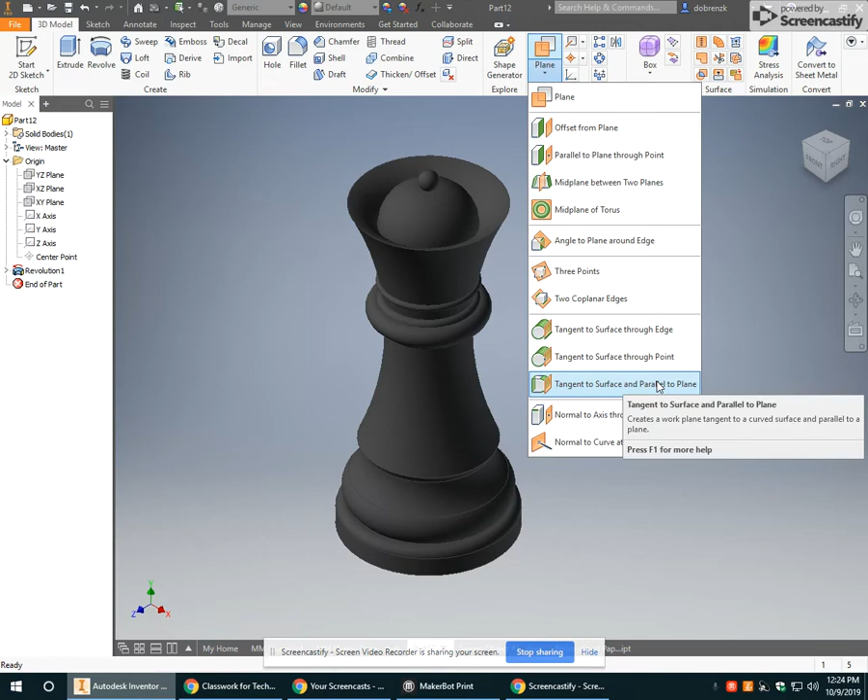Now, there's a lot of ways I can do that. I have lots of different ways to create planes. What I'm going to choose to do, personal preference, I would say, is to use a tangent surface parallel to plane. I generally like that parallel to plane aspect because I can choose an existing plane and just put it in a different location. So if I open up my origin folder here on the browser and I roll over the existing planes, the origin planes, what I like to do is pick the one that I want to make parallel just in a different location.

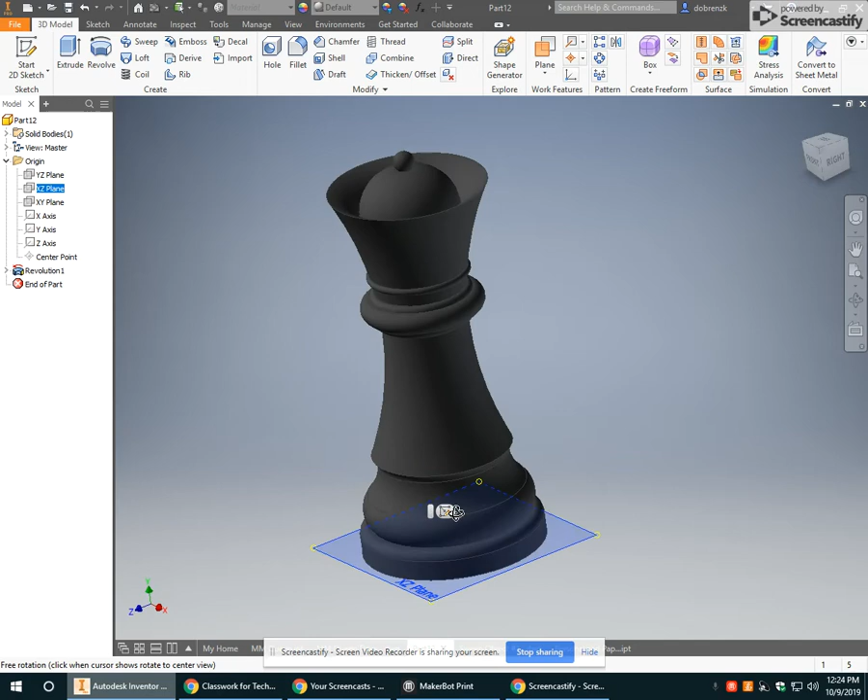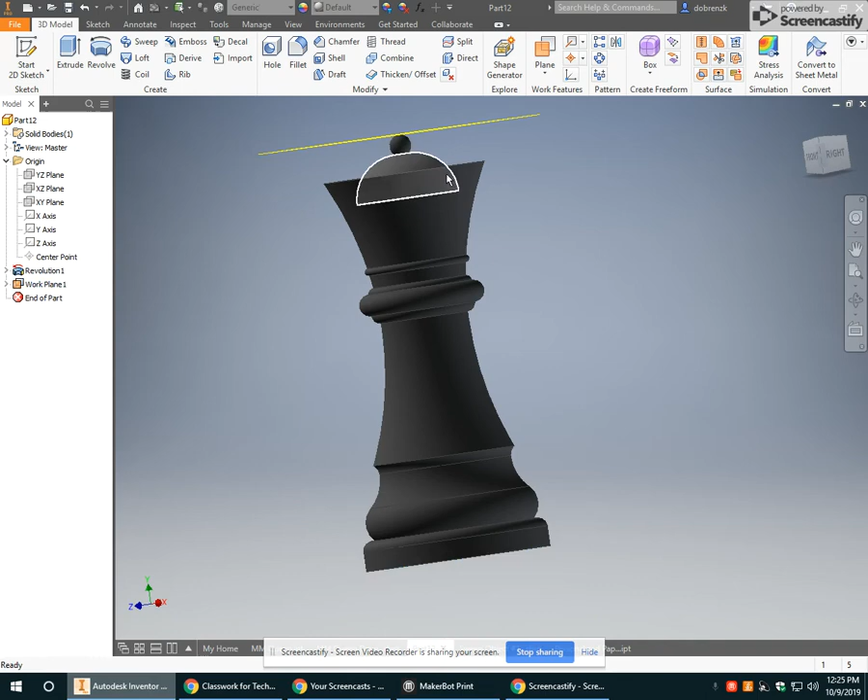And the XZ plane is the one I want to replicate because it is essentially flat on the bottom and I want one flat on the top, so parallel to that, just in a different spot. So I can highlight this and then click the button, or I can click this button and then go highlight it. Really doesn't matter. And once I have this selected, it's going to give me possible locations to put my plane. You can see how it previews it here. And I'm going to go to the very top. I just feel a little more comfortable that way. So no matter what happens, I'm only cutting in one direction.

So now I have this work plane on the top, and on this work plane, I can easily start a new sketch and start doing my scallops, which I can see in my drawing here. This top view shows me exactly what I'm looking for. Now, I don't have too many dimensions here, and honestly, depending on if there was a little variance in any of your measurements, these won't work if your crown was any different than what I have here.

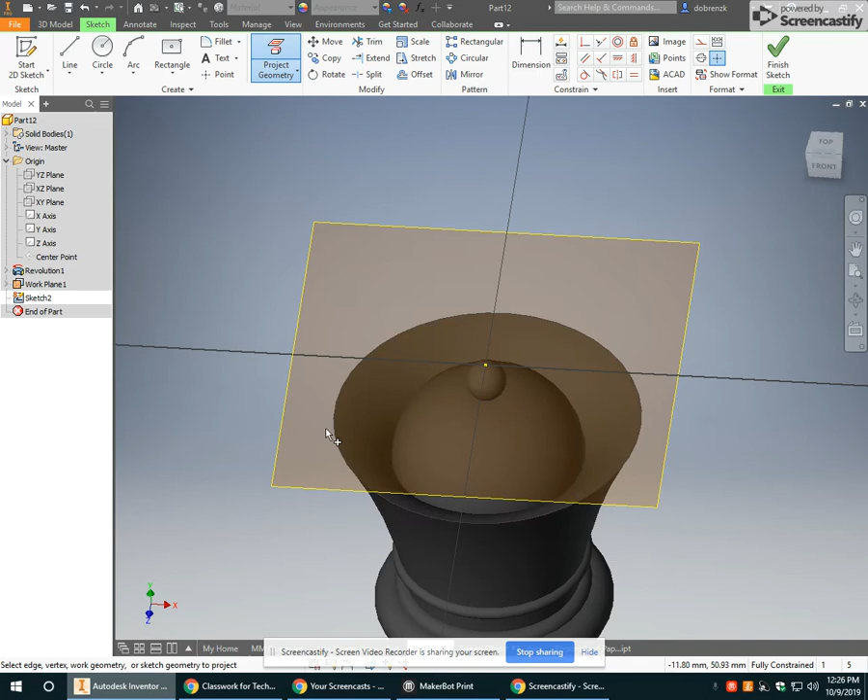So what's more important to do is use the existing features, the existing crown, and we can do that by using our project geometry tool, which essentially allows us to import lines that already exist or circles that already exist. Now I have a lot of different circles that pop up, so what I want to do is tilt it to the side so I can make sure I'm getting the top edge of that crown, because that's the one I want. And as you can see, once I click it, it imports it into my sketch. And now that's the sketch that I'm going to use as a guide.

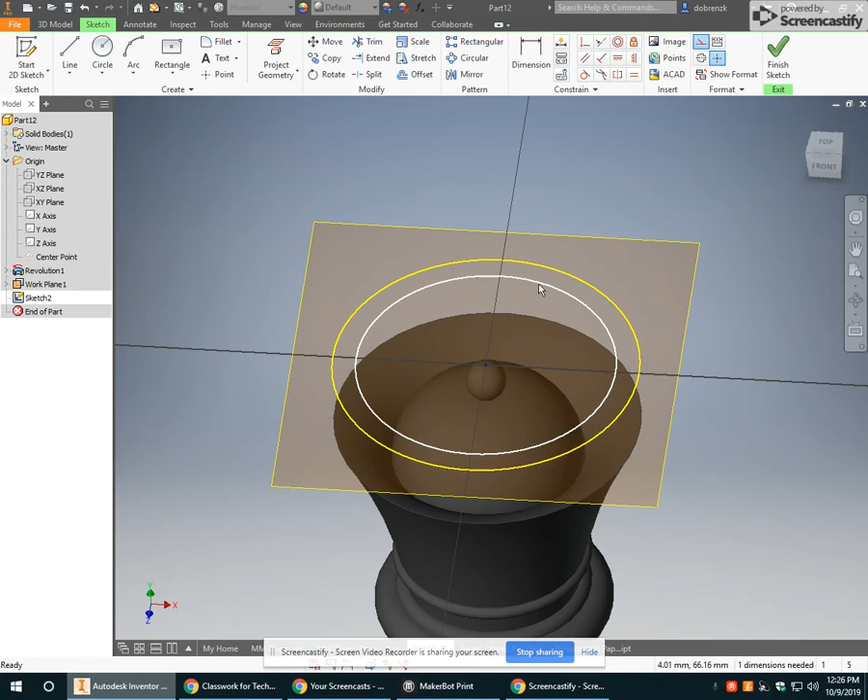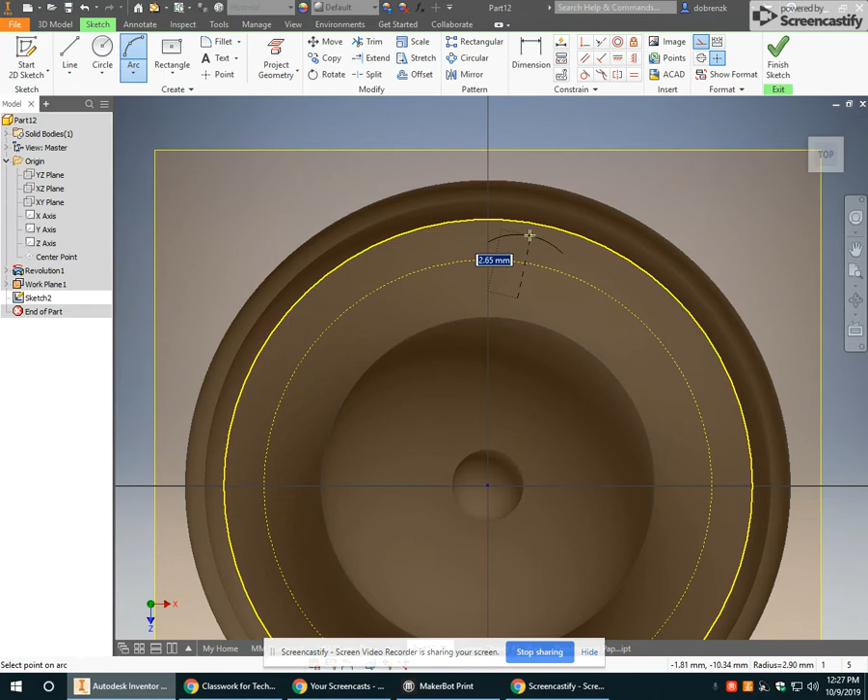I'm going to put one more circle on the top, and that's going to be a construction circle. And this is going to help me guide all my center points, so I can have all my center points on the same side. I'm going to get back to my top view, and I'm just going to use the arc tool, and I'm going to start making these arcs. Now what's really important is that your arc needs to be tangent to that yellow line you just made. Tangent. We'll go over why in a minute, but just know we're going to be using a lot of tangents in this sketch.

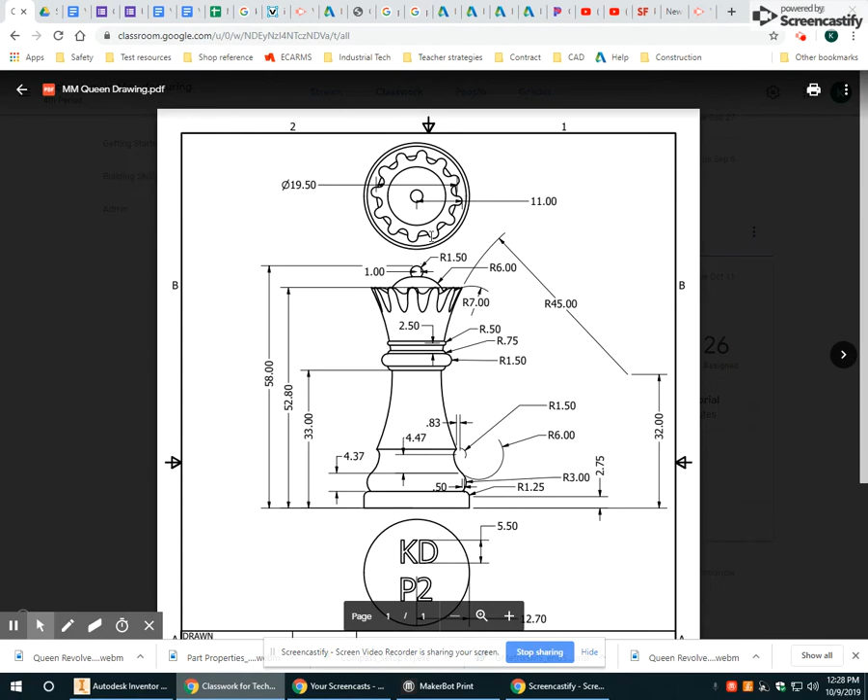So I'm going back and forth and creating, I keep doing construction. Let's get rid of that construction. Just doing a lot of arcs. Now I'm just going to do 3 to show you right here. Actually, I'm going to do a few more than that. Now, it doesn't really matter where I end up with all these. Now, I'm not accounting for how many actual cuts I have here. You need to make sure that you count how many and replicate that, but I'm just showing you the process, not doing all your math for you too.

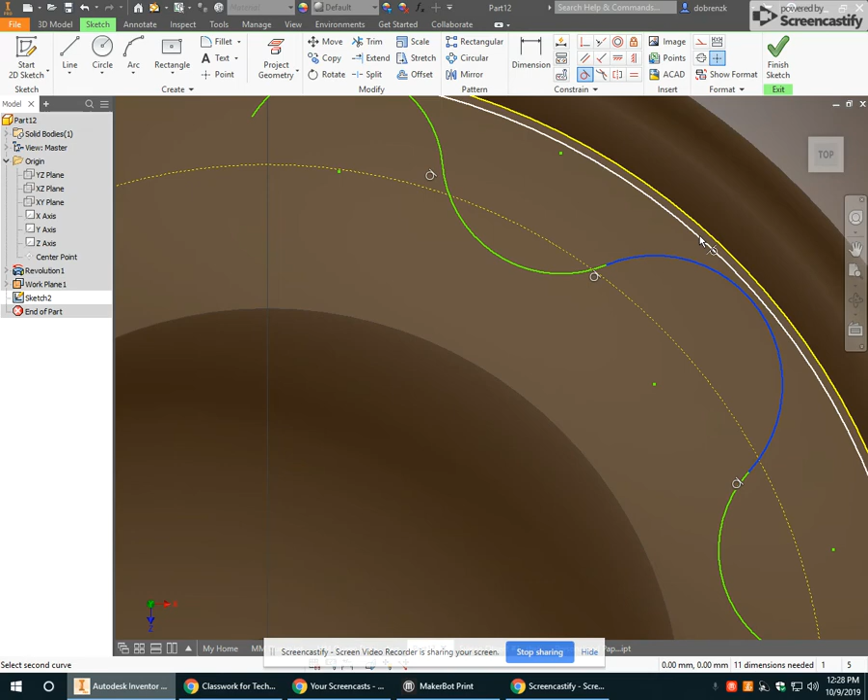So my tangent constraint is going to be very important for this sketch. For one, I need to make sure that all these arcs are tangent to each other, but that's not the only thing. I need to make sure that this curve is tangent to the larger circle. That's going to make sure that my cut goes right up to the end. All right. And I'm going to go ahead and do one more arc in here.

Actually, should probably do two more. Now, the reason I can move those around is because I have not given them a diameter yet. And they're still green. And as we know, green things I can usually move around. If I had given these arcs a size, a dimension, then I wouldn't be able to move them around. I wouldn't be able to shrink them and expand them. So it's kind of important you don't start assigning those values because you actually need that flexibility.

Now, one thing that I find extremely helpful is to use a constraint to keep these items vertical. Now, I actually want to say that it's a horizontal constraint I need because I'm kind of looking at this upside down. So if I put a horizontal there, oh, I take it back, it was vertical. Some of you may need to use the horizontal instead of the vertical, just depending on how you first made your object. I'm going to go horizontal on this side.

And so now I'm doing exactly 1/4 or 90 degrees of this 360 degree circle. That's what those two vertical and horizontal constraints help me do. So I locked in this edge and this edge. Now you can see that all my arcs are not the same size. Well, I know if I use an equals tool that I can make them all the same size. And I want to say this arc is probably the closest to the right size. So I'm just going to start here and make all these the same size.

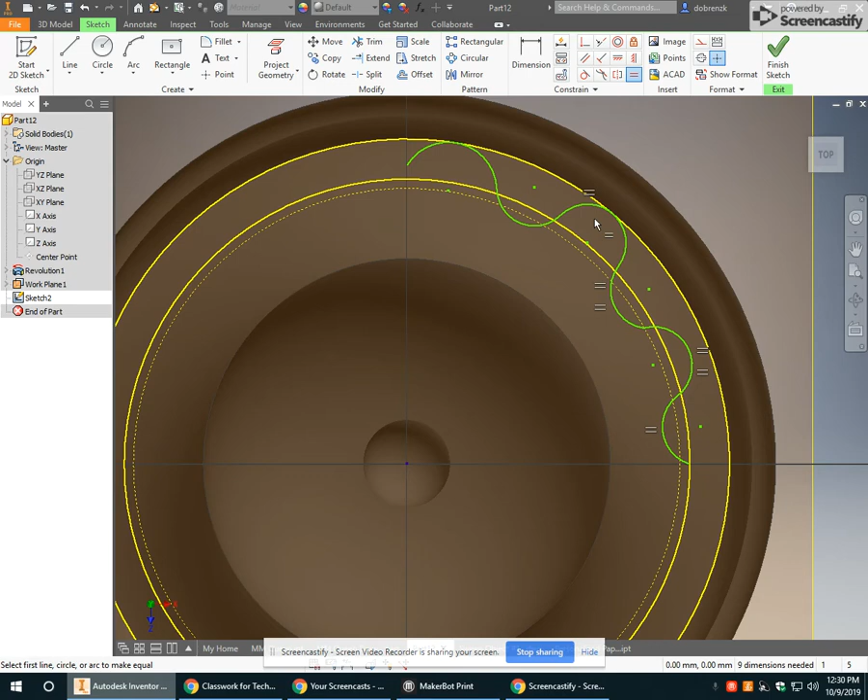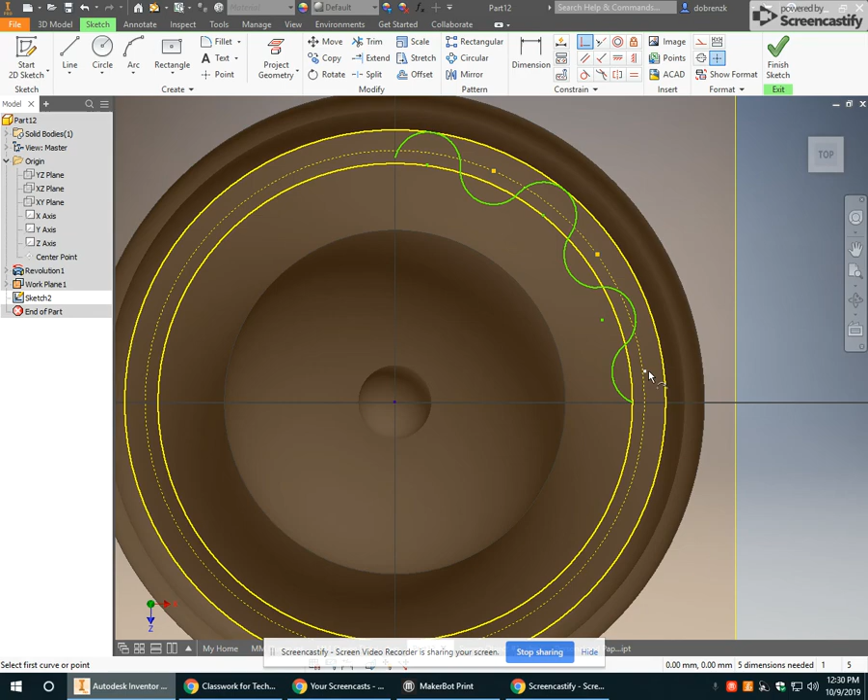So there we go. So now all those arcs are the same size. But we can see the center points are not all in the same area. The way I like to do it is use my circle that I already put in there and put my center points on one of them. So I'm going to use this inside curve and put all those inside curve center points on that line, because that's going to hold my geometry.

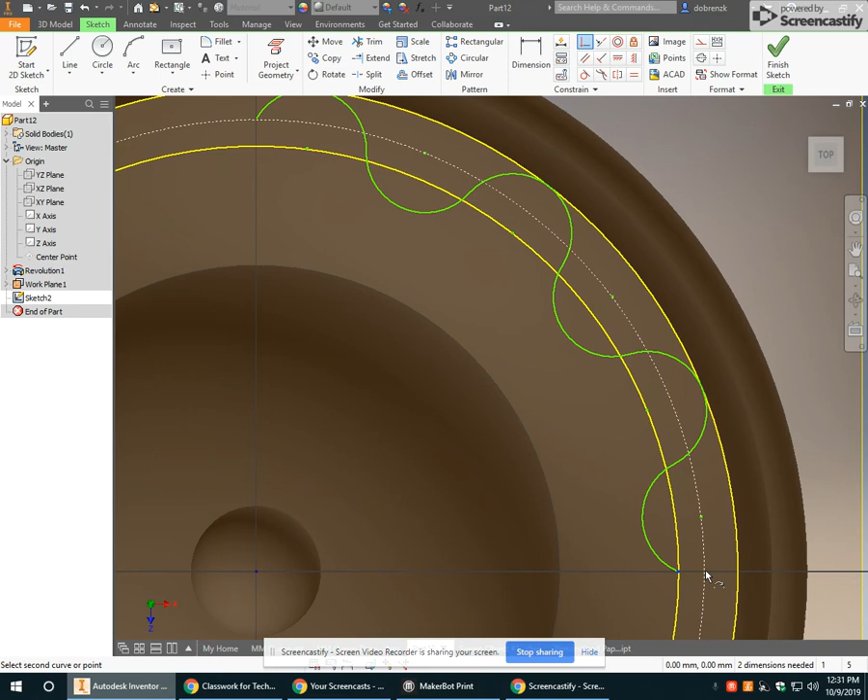And I am missing a tangent right here. I want to make sure those are touching. All right, and I've mentioned a tangent there. The rest of the curves look good, but let me make sure there's one there, and there already is. Okay, now I'm getting there, I'm not quite there yet. Now we can see that this curve starts on the circle and this one does not end on the circle. So I need to make sure I do that. All right, that looks pretty good.

Now, some students have been successful using the circular feature to replicate this quarter circle around the whole diameter of this, and some students have not been able to do it. So you can try to do the circular pattern tool and recreate this, but if it doesn't work, then create it by hand, and usually it will extrude out that way. My axis obviously would be that center point. And so there you go. So that's the idea of the circular pattern tool.

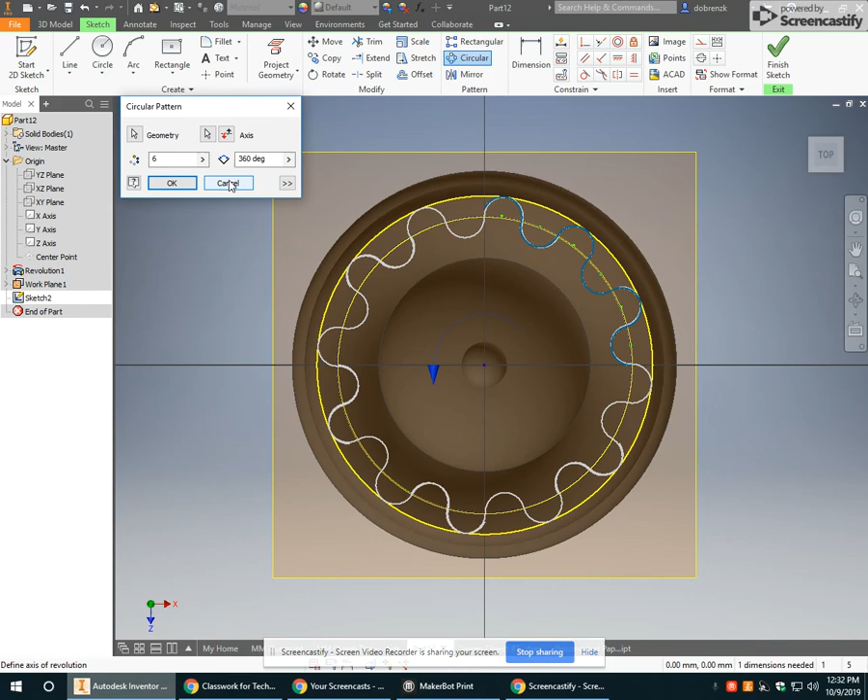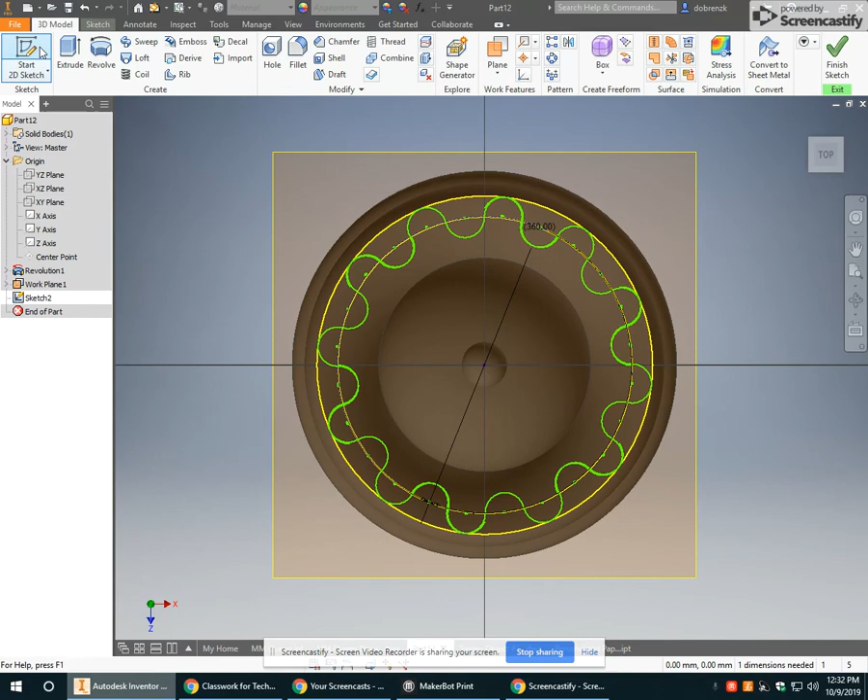It's a little bit of a time saver, but sometimes for whatever reason, and I haven't been able to dive in and find out, it doesn't let you extrude even after you do that. For our purposes, let's go ahead and try it and see if it works, but you know, there's a good chance it may not. So let's find out. Okay, looks good. Let's see. Can I extrude that? So as you can see, the extrusion is just not working right.

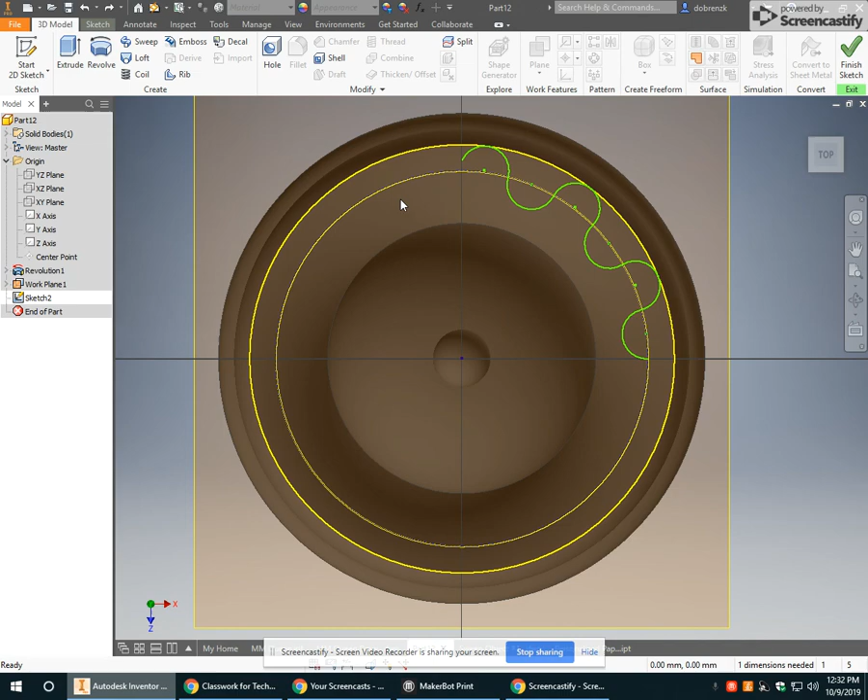So what you need to do instead of doing that circular pattern tool is go back and draw these in by hand, going all the way around, put your constraints in, and then go ahead and extrude cut it. And when we extrude cut it, we're going to want to go obviously down, but make sure you don't go too far down where you're cutting through other components. You only want to cut through this crown area. So you're going to have to play with your distance to get that correct. And that is how you put those designs in the crown.